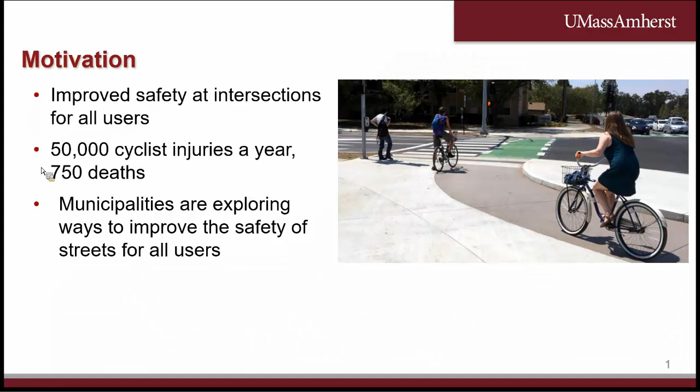So a little bit about protected intersections. They're typically characterized by the presence of curb extensions with bulb outs. One primary example of these types of intersections are Dutch intersections, which are prevalent in the Netherlands and have slowly been adopted in some US cities. These intersections are highlighted by protected access points to and from the intersection for cyclists, sometimes with their own separated phasing patterns, as well as their own light signals to accompany their movements.

Sometimes they can be highlighted by different kinds of pavement markings as well to denote to other road users where the cyclists will be when they cross. And sometimes those are before or behind an already existing crosswalk.

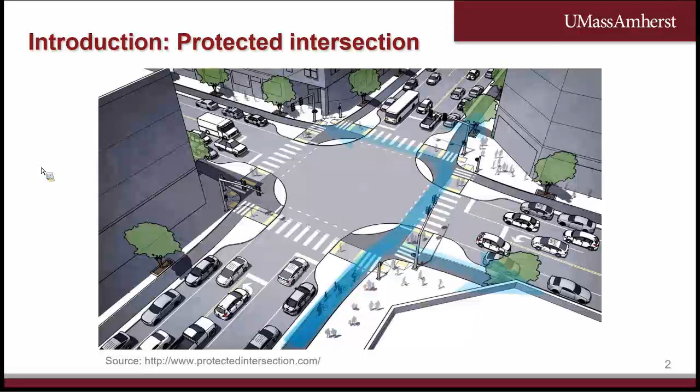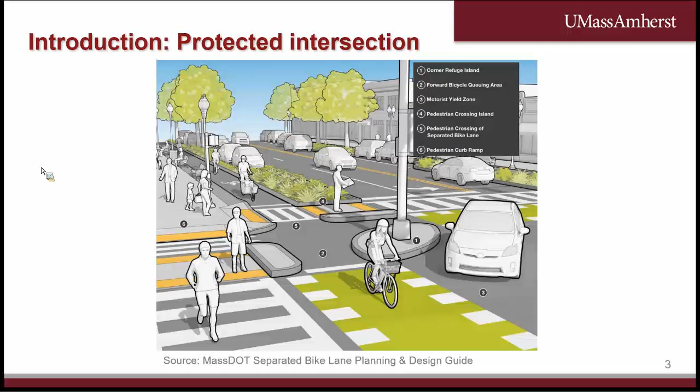This is just another example of a protected intersection highlighting the different elements of safety that could be addressed. So you have a different level of bicycle marking with the green and the dashed white. You have capacity to hold a car at point number 3. As the car is turning right, there's space for it to wait without encroaching on the space designated to the cyclist. And it can incorporate other types of medians and sidewalk buffers as necessary.

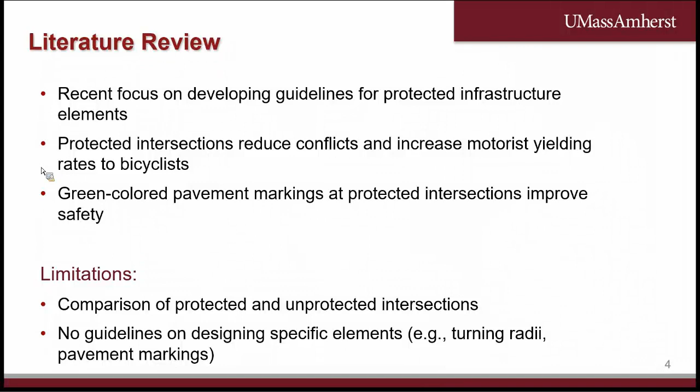And so this project focused on developing guidelines for protected infrastructure elements, specifically looking at increasing the yielding pattern and behavior of motorists to cyclists through changes in the design of the intersection by the size of the intersection turning radius and the type of the pavement marking that was used. And so in the US, there's not a lot of literature comparing protected versus unprotected intersections, and there's no specific guidelines on how large or how wide your pavement marking should be if you're trying to create protected cyclist infrastructure.

And so this project looked at the effect that changes in protected intersection radius have on driver behavior while they're making a right turn through a protected intersection, and then also what effect does level of pavement marking for the cyclist have on driver behavior while performing right turning movements as well.

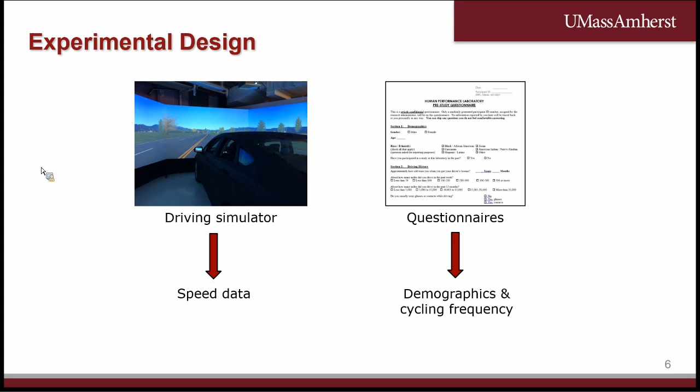And so our experimental design consisted of a driving simulator study where each participant was asked to drive 12 separate drives. And then after completion of those drives, they were asked to fill out a brief questionnaire recording demographic data and cycling frequency to understand how prevalent or how accustomed they were to different protected elements and how safe they felt as cyclists.

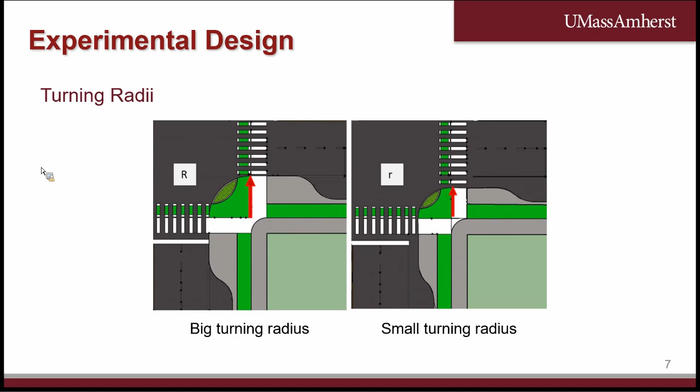And then the next level of variables was on the level of pavement marking that the driver experienced at an approach to each of the different protected intersections. And so there were 6 different combinations of intersection radii and pavement marking that drivers were asked to drive through during the experiment.

And it was focused with just your standard intersection with protected islands with no additional level of marking, a dashed white marking, and then a solid green marking accompanying the dashed white marking was the highest level of pavement marking that we chose to analyze for this experiment.

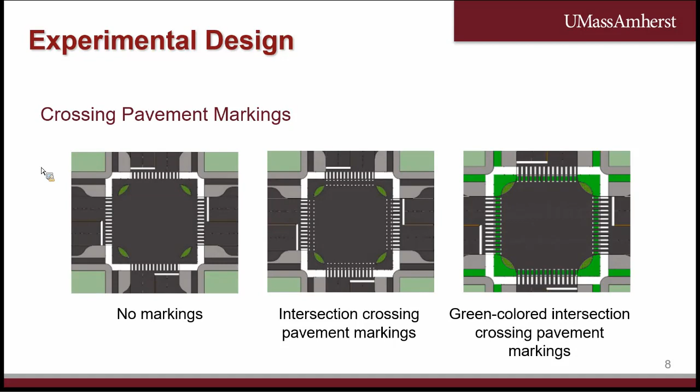And so our experimental design, if you put yourself behind the wheel of the driving simulator here, I'm just realizing my arrow is going to be backwards. But we incorporated both right and left-hand turns in our study to, one, prevent simulator sickness and mix up the drives so as to mask which variables we were necessarily looking to analyze. And so if you're a driver and you're approaching this intersection from the south and you want to turn left, then you're going to be following the path of this red arrow.

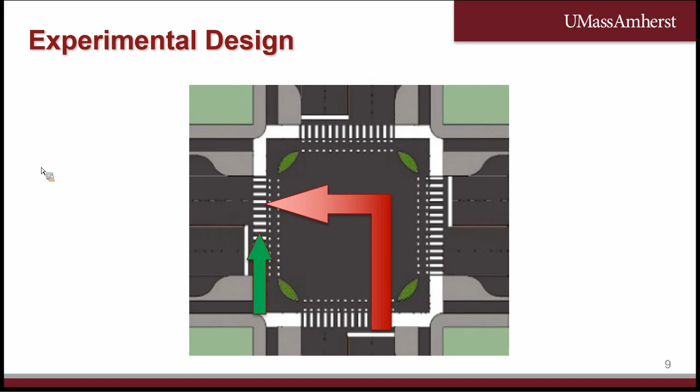And as you begin to approach the intersection from the south, a bicyclist would be started at the green arrow and cross the path of the intersection in front of you. This obviously would be flipped if you were turning right. The bicyclist would be crossing adjacent to you rather than on the opposite side of the traffic. But this was done to prompt users and see how they reacted to the presence of a cyclist in a protected intersection and to see what speed differences and behavioral differences were observed.

And this is a list of the 12 different combinations that we had of experiments. So we had 3 different levels of bicycle marking, 2 different levels of turning radius, and half of the drives had a bicycle present and half of them did not, in order to measure what effect the bicyclist would have on drivers.

And so for the right-hand start position, drivers would start at the box on the left. They'd drive through the first intersection and make a right turn, and they either would or would not encounter a cyclist crossing the path of the right turning movement that they were performing. And then they'd have a straight segment, and then they'd perform a left turn at the second intersection they approached. And if they encountered a cyclist on the right turn, there would also be a cyclist on the left turn. But if there was no cyclist on the right turn, there'd be no cyclist on the left turn. And then they would end the experiment.

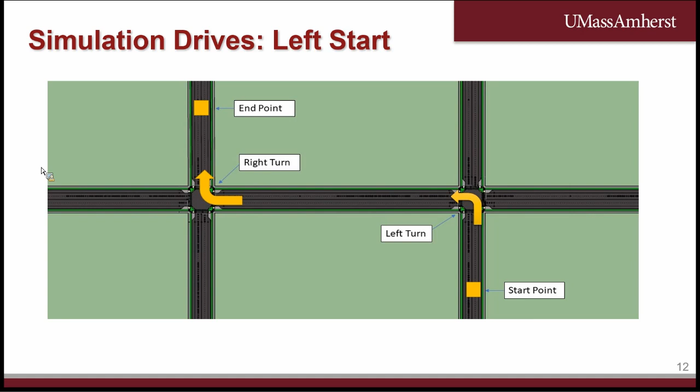And then we reversed the direction of the turns. So instead of going right first, we had the driver turn left and then right. Same thing with the cyclist. There may or may not be a cyclist present at both crossing paths of the intersection. This effect was randomized to, again, discern if drivers were always looking for a cyclist or if they got lazy or didn't recognize that there was a cyclist, but then had to brake suddenly because the cyclist was there.

We collected 3 different sets of data markers. So we wanted to look at the approach speed of drivers as they approach the protected intersection to see if the level of marking and the way that the curb was shaped influenced their speed. And then we also measured their speed as they were turning through the intersection to see what the speed was like as they started the turn. And then once they saw the bicyclist, did they come to a complete stop, or did they just slow down to a slow enough speed where the bicyclist could cross and then they could go immediately after.

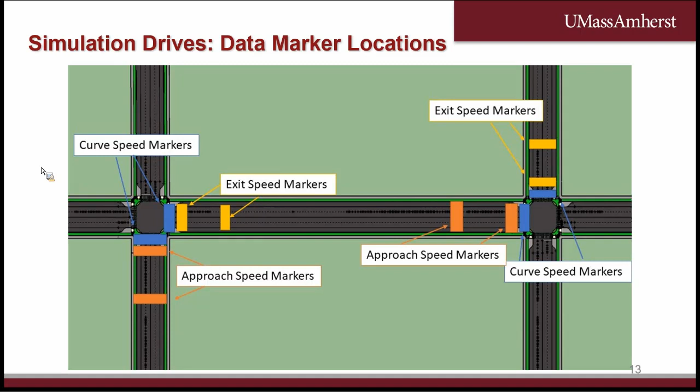We included exit speed markers as well, but we did not include that data in this analysis because most of the drivers accelerated very quickly after exiting the curve because it had a long straightaway, and the data wasn't as useful and also wasn't influenced by the protected intersections.

And so our independent variables are listed here. We had, as mentioned previously, the turning radius of the intersection, the bicyclist present or not, the pavement markings, and then participant gender and age. We tried to get an even split of male and female. And our participants, we ended up with 17 female and 19 male. And their average age was about 25. Given the student population of the university, this was what we were hoping to get.

Something split into more age categories probably would have been a little bit better data-wise. But in total, we collected a total of 432 right turns from these 36 participants for the ensuing analysis.

And what we found is presented in these violin graphs, and that participants' approach speed on approach to protected intersections was generally higher than what their speed was while turning through the intersection, which is something that we would hope. Their speeds were slightly lower based on whether or not a cyclist was present. And we performed 16 different tests to determine whether the observed speed differences were statistically significant.

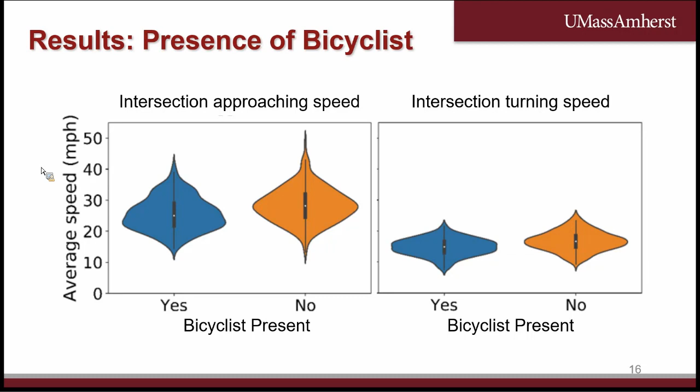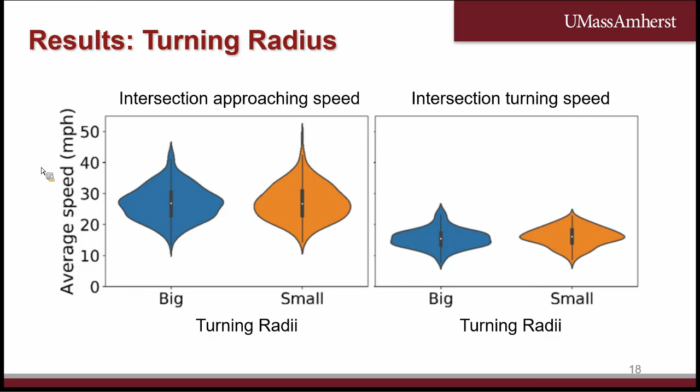And our t-test showed that the approach and turn speed with and without a bicyclist in relation to the participant behavior, the presence of the cyclist was a statistically significant variable. And then we got into looking at the turning radius. And these graphs kind of mirror the first set of graphs with the bicyclists. And what we found is that the approach speed was not statistically significant, but the turning speed was. And I wish I had the, let's see.

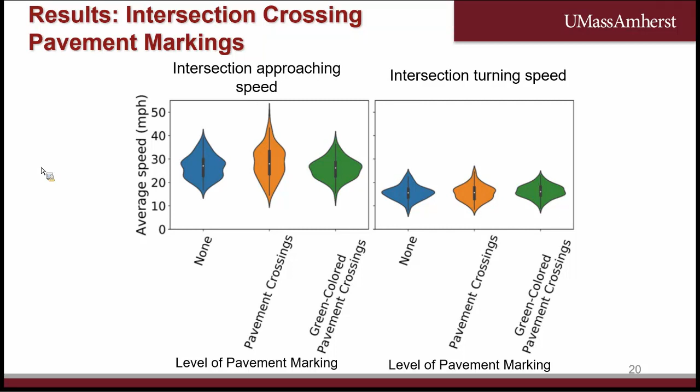And we also did a t-test for this one, and we found that the pavement markings had a significant effect on driver behavior on the approach speed, but interestingly, not on the participant's turning speed. And taking all this data, we performed a regression analysis to see all the variables together, which one had the most influence on driver speed throughout the intersection. And the only variable that came away as statistically significant after this was the presence of a cyclist.

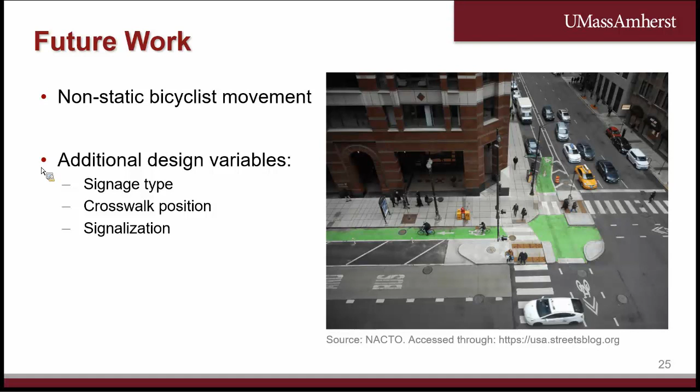And that concludes my presentation on dissecting the safety benefits of protected intersections, and I will open it up to questions.

All right, so Nick, the question came in. Did you ask participants after the session if they had any reactions or impressions regarding the various conditions? Just curious if they shared any added insight. Yeah, part of the debriefing process for this experiment was to ask participants what they thought was being measured. And a lot of them actually thought it was just purely a bicyclist study and whether or not we were looking to see how they interacted with cyclists.

A lot of the drivers, from my recollection, mentioned that they didn't necessarily realize that the radius of the intersection was changing. But they did pick up on the changing level of pavement markings, but they did not realize that the size of the turn they were being asked to perform was significantly different.

Nick, in the scenarios, was there any traffic? I'm thinking, for those left turns that might have affected the speed that they were crossing, or their turning speed. Yeah, no, the short answer is I did not include ambient traffic. So it was just the driver in an urban environment and going through two turns, and they either did or did not encounter a cyclist on both turns. Okay, thanks.

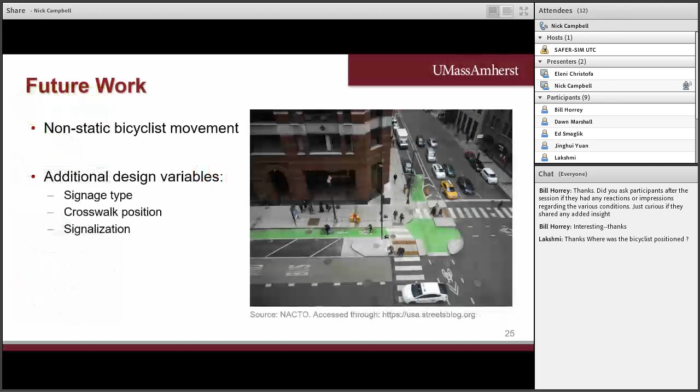Okay, that question came in. Where was the bicyclist positioned? So I'll bring it up on the screen here. So the bicyclist, if there was one, was prompted to start, I don't know if my cursor shows up, but basically right where the arrow for the right turn box is where the first cyclist was, and then if you flip that position for the left turn, they'd start on the opposite sidewalk of the driver, going in the opposite direction, so that the cyclist was always crossing the path of the participant.